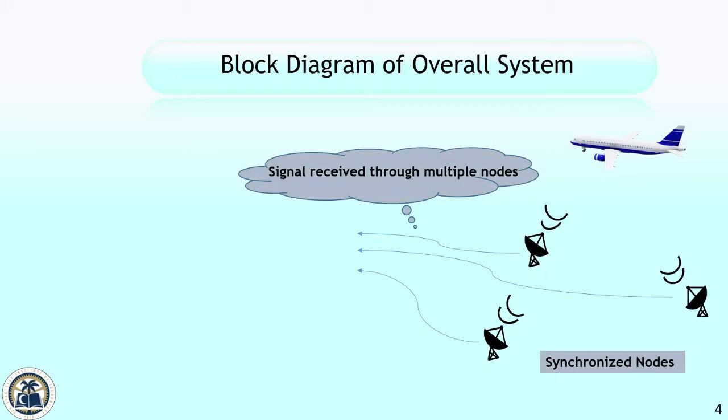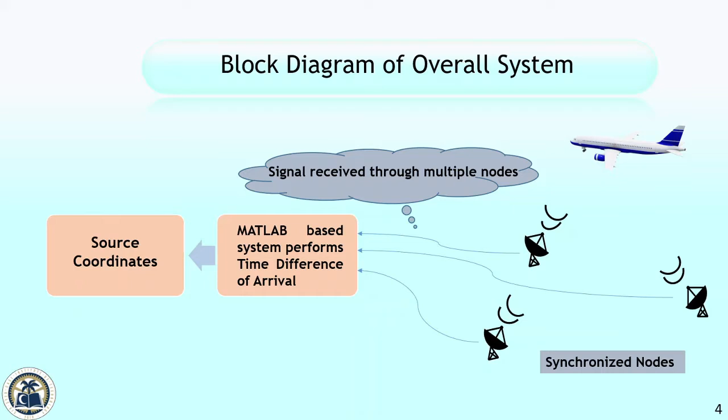Some of the latest techniques such as AOA and TDOA have been explored. After research and consideration, we have come upon the conclusion that TDOA will be implemented. The receivers receiving the signals will be synchronized. The received signals will be sent to a MATLAB-based system performing TDOA. The signals thus received will be used to extract the required information, that is, coordinates of the target. As for the transmitter, our system will be located near the airport so that we can receive signals easily. Next, Anmol Kiran will give the progress report on TDOA.

Time difference of arrival was one of the methods under consideration. This method is based on precise measuring of the time difference between signals arriving at the receivers. The desired target, depicted as an airplane, emits certain signals and sensors mounted on receivers capture those signals. Distance is measured by a well-known distance formula and interpreted to form a set of non-linear equations. These equations form hyperbolas and the intersection point of these hyperbolas gives us the coordinates of our target. In this scheme, the receivers need to be accurately synchronized. They need to run the same clock.

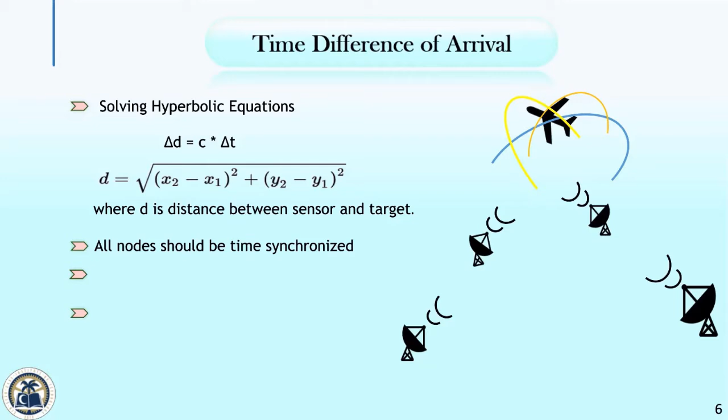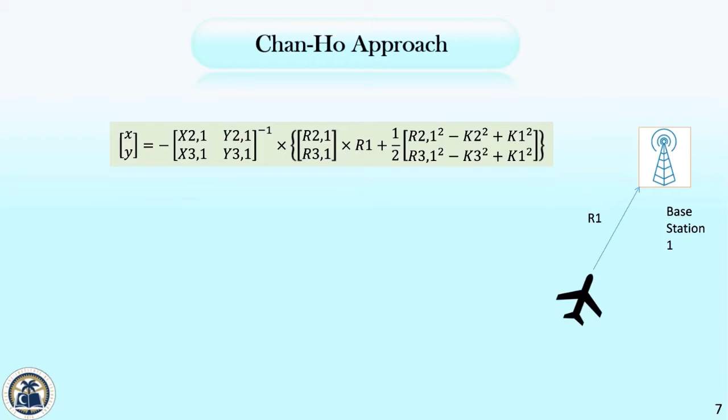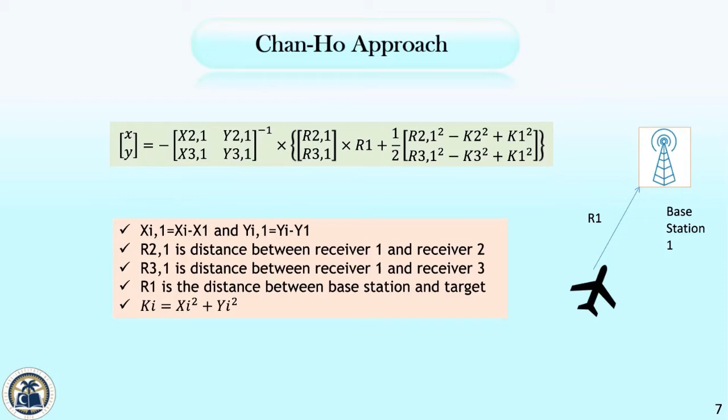To solve TDOA hyperbolic equations, two approaches have been considered. Chan-Ho is a method that is widely used in solving the TDOA hyperbolic equations, and its performance is highly dependent on the pure distance between the home base station and the target, represented as R1 here. After obtaining the first batch of X, Y, we can reiterate the calculations again for more improvement. This can take from 1 to 4 cycles in many of the cases.

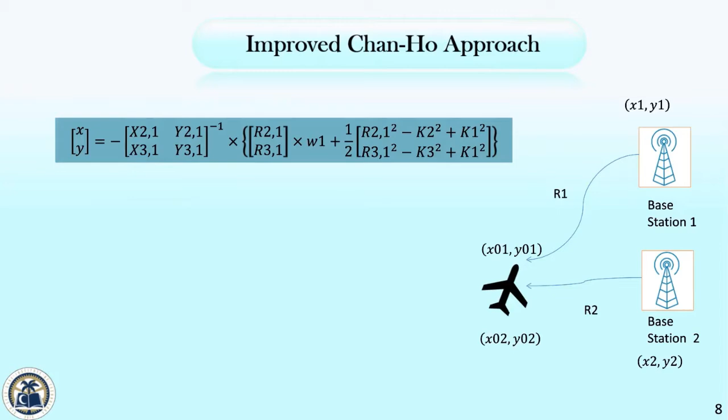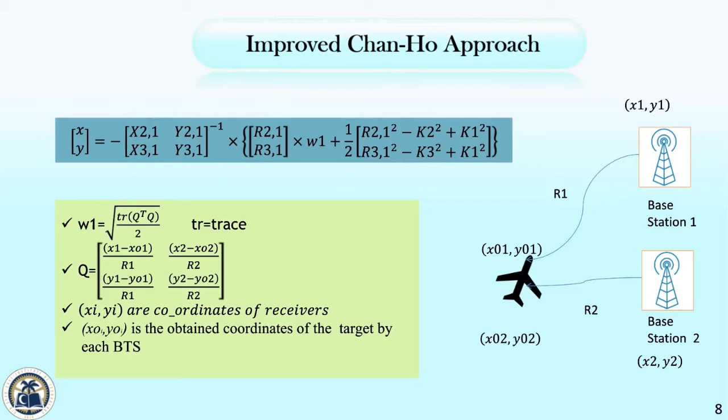The proposed improved procedure uses another term that will utilize the relation between the target and two transceiver stations. Here R1 is replaced by omega. Omega depends on the ratio matrix Q; the trace of the symmetric matrix obtained by the dot product of Q transpose and Q is computed, followed by the arithmetic square root.

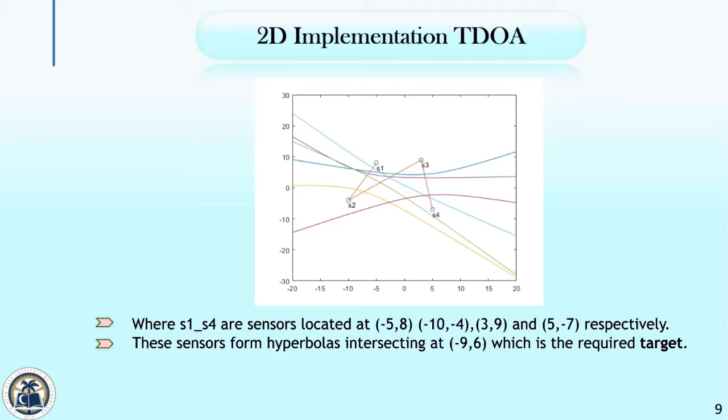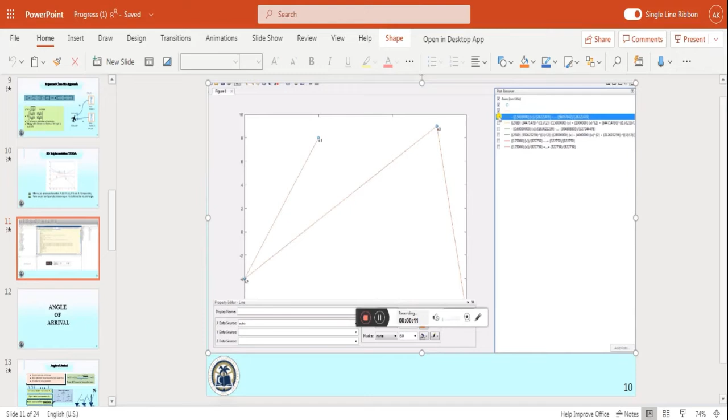Here is a 2D implementation of time difference of arrival with 4 sensors located at (-5, 8), (-10, -4), (3, 9), and (5, -7). These sensors form hyperbolas intersecting at (-9, 6), which is our required target. A visual demonstration of time difference of arrival is here. As the time difference of arrival follows a hyperbolic relation with distance, the TDOA method results in a hyperbola for each pair of sensors. The hyperbola for each pair of sensors can be seen in similar colors. The intersection point of these hyperbolas will give us our target.

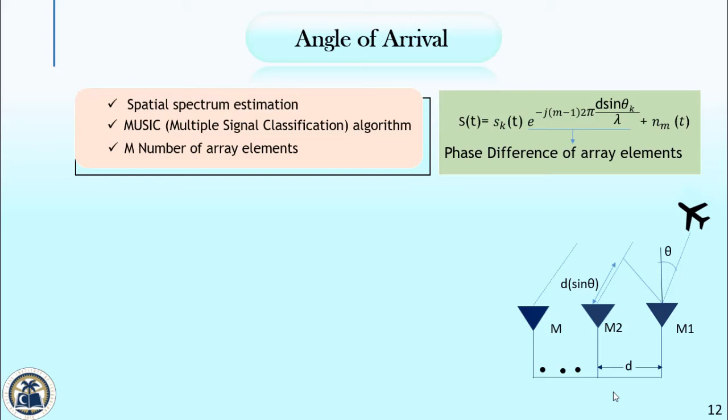Over to Rana Fatma. The second technique under consideration was angle of arrival using the MUSIC algorithm. This method is based on spatial spectrum estimation that expresses signal distribution from all directions to the receiver. The MUSIC algorithm is a subspace technique and makes use of array elements. A phase difference exists when the same signal arrives at different array elements. By capturing the signal at each element, the MUSIC algorithm first computes the correlation of the captured signal, then decomposes it into signal and noise subspaces by eigenvalue decomposition, and by using the orthogonality property of the signal and noise subspaces gives the spectrum. Finally, by finding peaks, we get the angle of arrival.

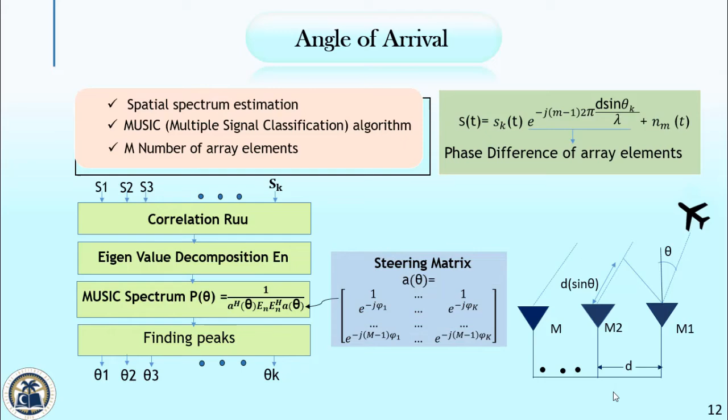The steering vector contains phase delays between array elements. This is the result of the implementation of the MUSIC algorithm with 5 equally spaced array elements, which gives a spectrum having a peak at an angle of arrival of 47 degrees. A visual demonstration of the MUSIC algorithm is shown here.

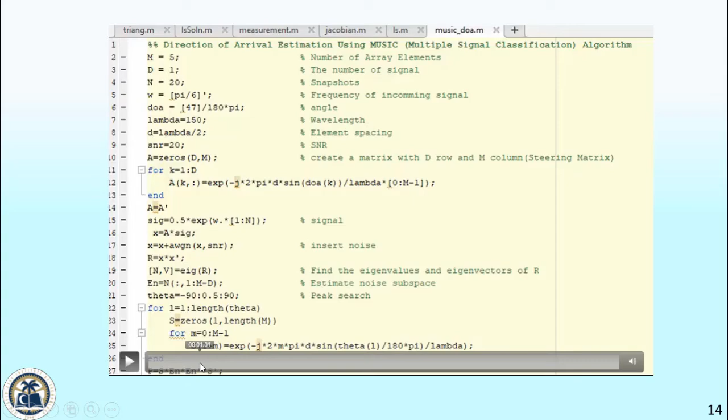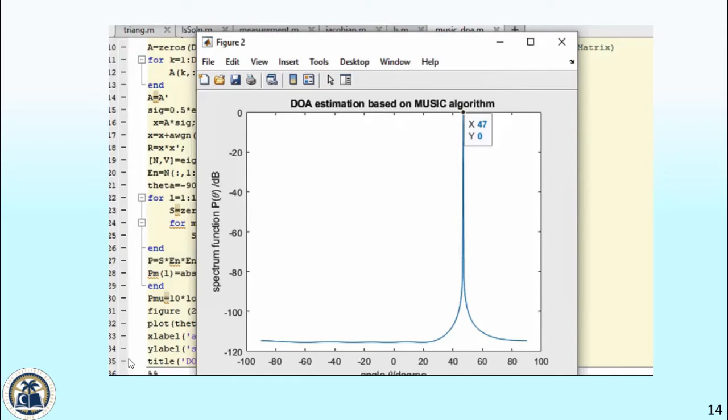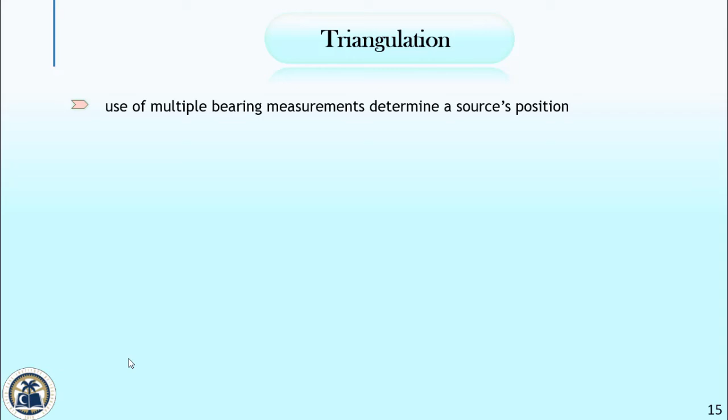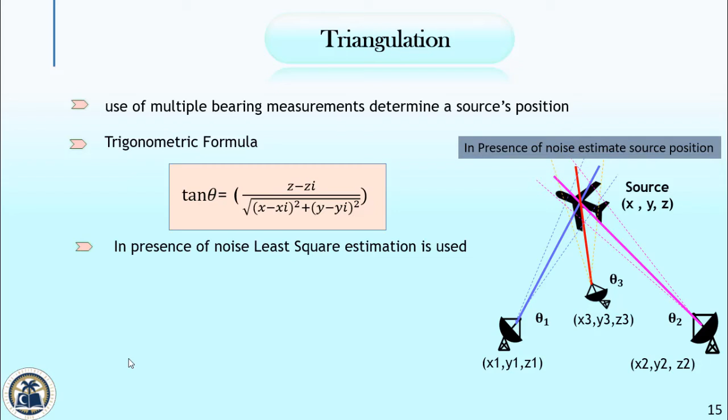AOA only gives the direction of the incoming signal. To locate the source position, triangulation can be used. It involves multiple bearing measurements that intersect at a point, so the source position can be calculated using trigonometric formulas, where the angle and sensor positions are known. In the presence of noise, we do not get the exact location, so least squares estimation is used, which best minimizes the error between the actual and estimated positions.

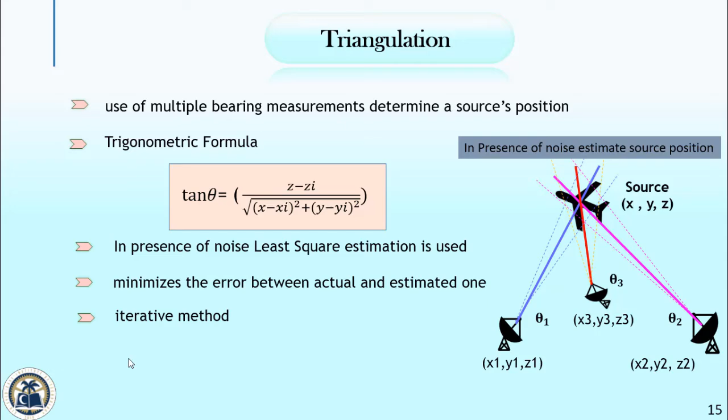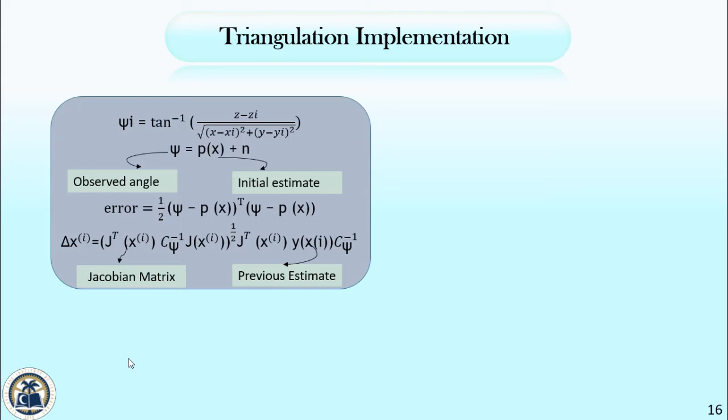It is an iterative method. Here psi represents the angle obtained from the MUSIC algorithm, p is the initial estimate, and by computing delta x and adding it to the previous estimate a number of times, it converges to the source position. This is the result of the implementation of triangulation that gives source coordinates 2.3361, 3.8672, 2.9949 with an error of 0.0011, while the actual source coordinates are 2, 4, 3. Next, Zia will give the progress report on time synchronization.

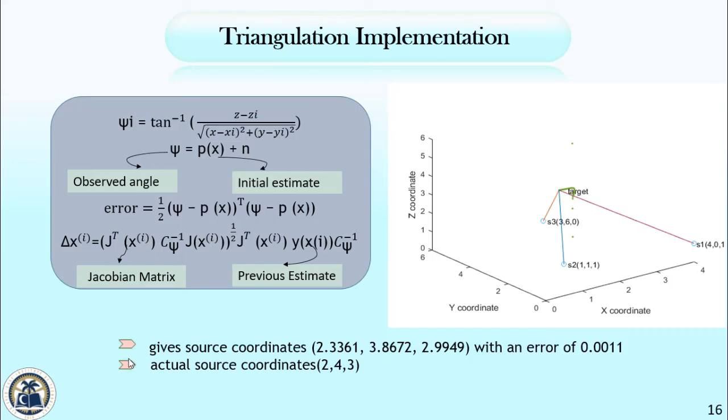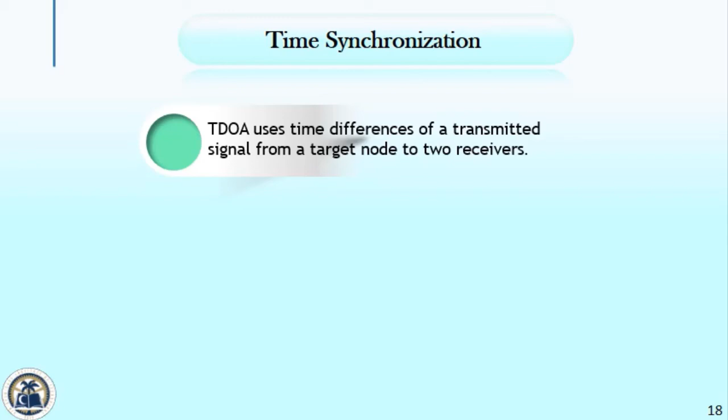Ahmad Ziaullah here, and my topic of presentation is time synchronization. For time difference of arrival, receivers need to be synchronized because TDOA uses time differences from the target node to the receivers. For time synchronization, GPS, the global positioning system, can be used. We are using the Beitian-220, which is a high performance standard GNSS module for receiving GPS signals. GPS satellites are equipped with atomic clocks that provide accurate timing information.

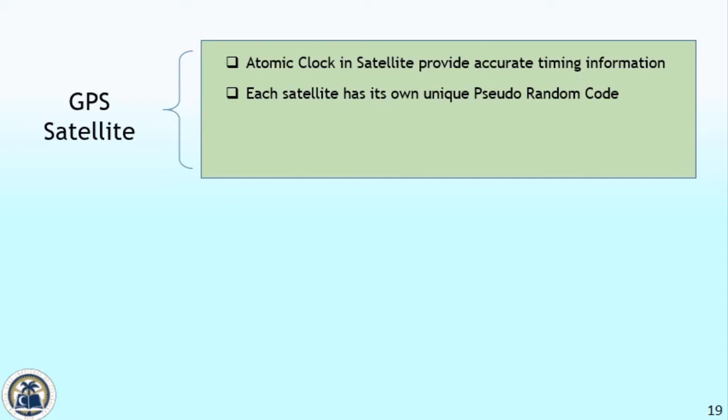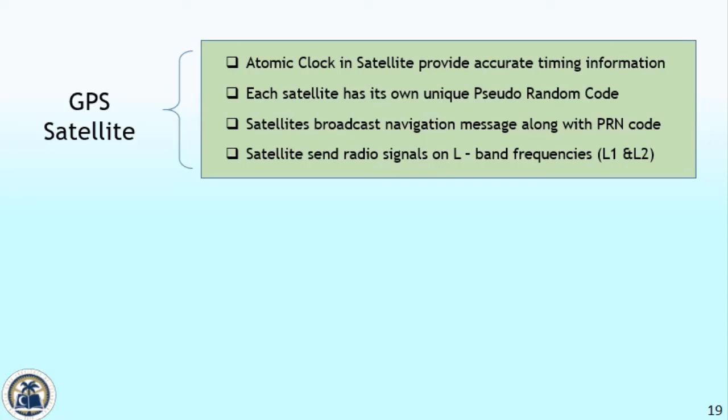Each satellite generates its own PRN, pseudo-random code, and the signal that each satellite broadcasts contains a navigation message along with the PRN code. Navigation messages contain information about satellite positioning and timing. It transmits signals on L-band carrier frequencies, L1 at 1575.42 MHz and L2 at 1227.6 MHz. All satellites use the same carrier frequency. The module receives the L1 frequency. It outputs in NMEA 0183 format. On receiving signals from 4 satellites, it will be able to calculate its position.

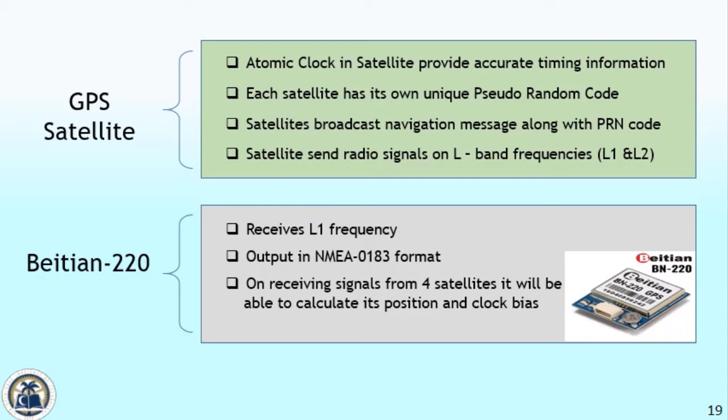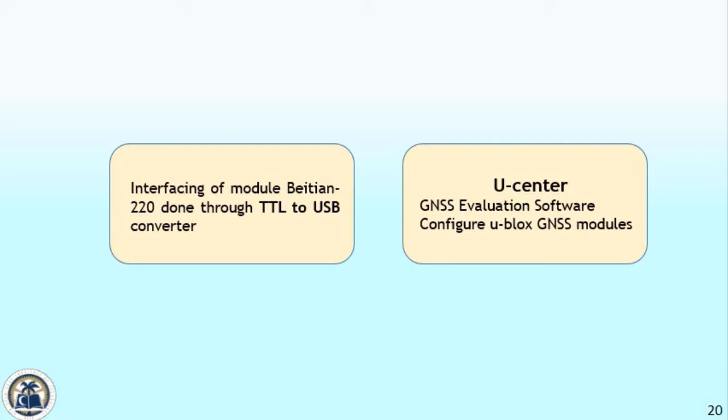Interfacing of our module can be done using a TTL to USB converter, and the software that we can use is u-center. It is GNSS evaluation software and can be used to configure u-blox GNSS modules.